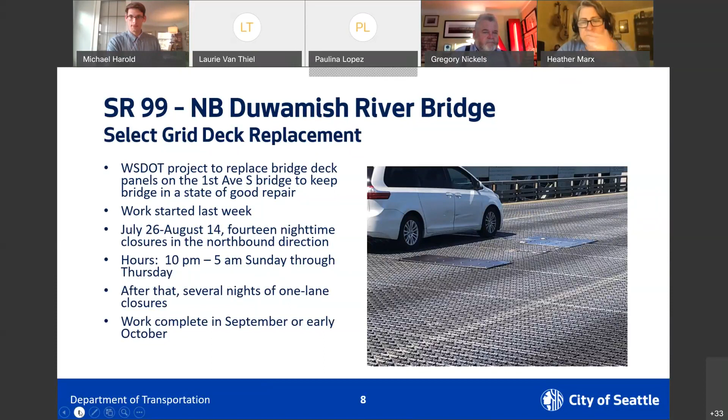transportation benefit district term, and how much the district would charge. Most of that is going to be sales tax, but depending on what kind of response we get from the state Supreme Court, we may have a vehicle license fee there. If you have more questions about that, please put them in the chat, and Bill Laborde, who is our resident expert on this topic, can answer that.

One of the important things is that there is a lot of, next slide, please, sorry. There's a lot of support within this STBD proposal that would address some acute mobility needs that we have in West Seattle and the Duwamish Valley. It would support more surface transit so that we can achieve that 30% transit mode split that we are after, and also remembering that all of that traffic that is funneling through South Park and Georgetown is an equity issue. So we want to make sure that we provide people lots of options so that if you're able to avoid using your car through South Park and Georgetown, you do so. Next slide, please.

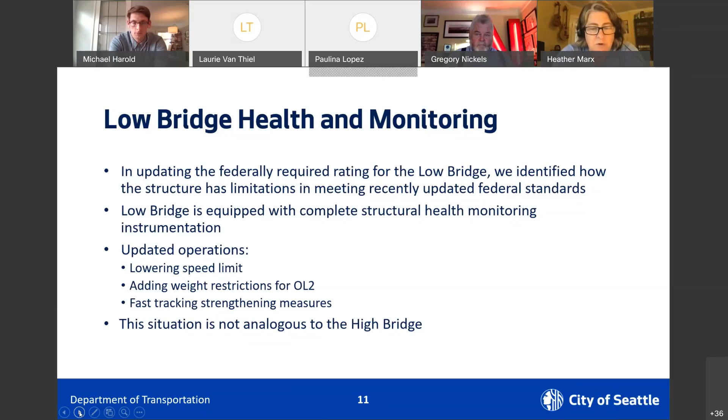So as we learned about how the low bridge is not living up to those new standards, we have taken some administrative steps to protect the bridge. The first is lowering the speed limit to 25 miles an hour. In addition, we're adding weight restrictions for the very largest trucks. They're called Overlegal 2, and we are fast tracking some strengthening measures that are going to help that. This situation is not analogous to the high bridge. There is not a concern right now that we have any kind of failure future for the low bridge. Next slide, please.

Our analysis indicates that an additional 160 vehicles can use the low bridge at any one time. And because this is the way traffic modeling works, we have to assume that those 160 vehicles are going to show up at any given time. So we have to plan for all of them to show up at once. Next slide, please.

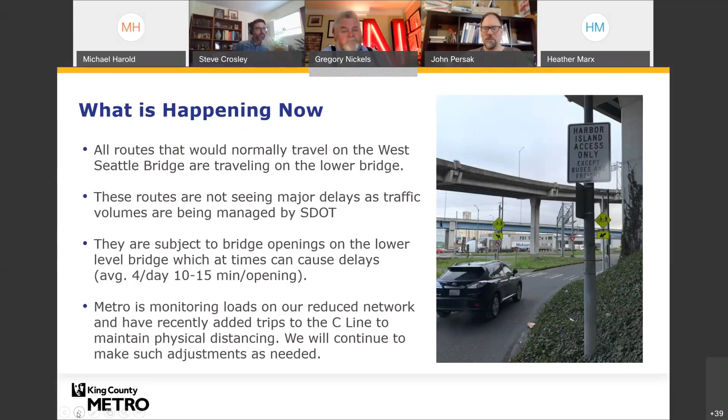As part of our action plan, we immediately set up a team to address the West Seattle response, and then we also set up a data analytics platform. Metro uses Microsoft Power BI to analyze data analytics, and I have a next slide actually showing a highlight of a page, but what we're actually looking at is route ridership by time

period. We're looking at bridge passenger loads, not just overall route ridership, but bridge passenger loads and crowding on that. So essentially thinking about the last stop for the C Line on Avalon and Yancy, and then the first stop for the C Line over Alaska and Columbia. How full is that bus compared to how full it would be in other parts of West Seattle?

Another really important thing that we're doing is we're monitoring segment travel times, and we're actually trying to disaggregate that even more than just from stop to stop. What that allows us to do is really assess reliability and any variance in that travel time. And for any wonky people, we're looking at standard deviations. So basically, if the overall standard deviation of delay is increasing over a period of time, then we know that that segment is becoming more unreliable.

And that allows us to, again, take a look at that segment and see if any transit priority improvements could be implemented. We're also monitoring bridge openings and delays, and we're actually doing that on the First Avenue South Bridge, the South Park Bridge, and the Spokane Street Bridge. Next slide, please.

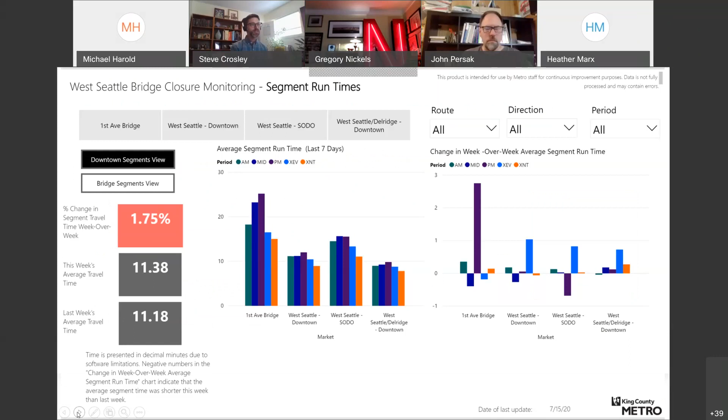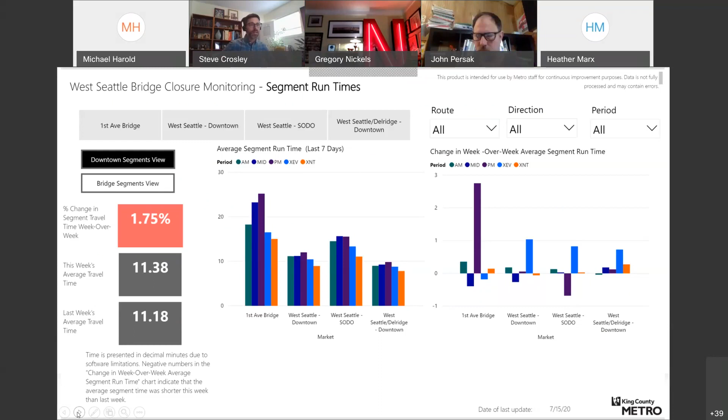And so you can see the PM peak, that purple line over on your right-hand side of the screen. There's a lot bigger variation in travel time on the First Avenue South Bridge in the PM peak than there was previously, and that's probably a lot to do with increasing traffic congestion. We also have these sheets for all the other types of data analytics, and we update them on a daily basis. Next slide, please.

So here we're going to get into Metro's response and our action plan. The day of the closure, we immediately established a West Seattle Bridge response team. I was designated as project manager. I report to Bill Bryant, who's the manager of service development, and then we all report directly up to our general manager, deputy general manager, and chief of staff on this project.

We meet frequently with SDOT to identify opportunities and develop solutions. We probably meet with SDOT in a variety of natures at least 3 to 4 times a week to talk about different aspects of the West Seattle response. We've also conducted some origin and destination surveys and analyses to understand travel patterns. The city has also done the same.

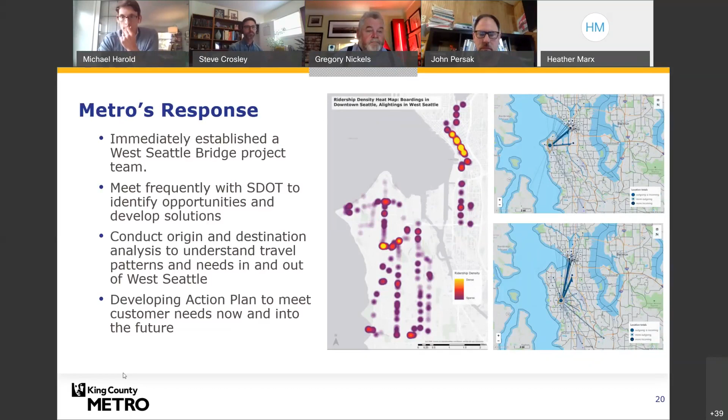Oh, so what I want to highlight about our action plan is that we are anticipating multiple scenarios. Right now, the Low Bridge is available and it's prioritized for transit and other essential traffic. Again, I live right in the neighborhood. I've taken the bus in and out of downtown just a couple times to see how things are going, and we are very reliable. It's a really quick trip because, for anyone on the port call today, we actually have added stops on Harbor Island to provide accessibility to the marina.

You probably can't reach North Harbor Island without some sort of assistance or a shuttle. But those stops on Spokane, on Harbor Island, really provide easy walking access to the marina. And so we're really hoping that the Low Bridge remains open and accessible and reliable. And that is really our best reliable pathway.

But we're also planning for and have already addressed short-term closures of the Low Bridge. We have reroutes in place when those occur. There have been planned closures of the Low Bridge and there have been unplanned closures of the Low Bridge, and they have been short-term closures. And so we have reroutes planned to go down West Marginal Way and over the First Avenue South Bridge. And then we have the third scenario, which we hope does not occur.

And in our discussions and meetings with Heather Marx, it sounds like that is hopefully less and less likely these days, with the city hopefully being able to wrap the structure. But if there is instability or some sort of collapse scenario and a long-term closure of the low bridge, we do have contingency plans for that as well.

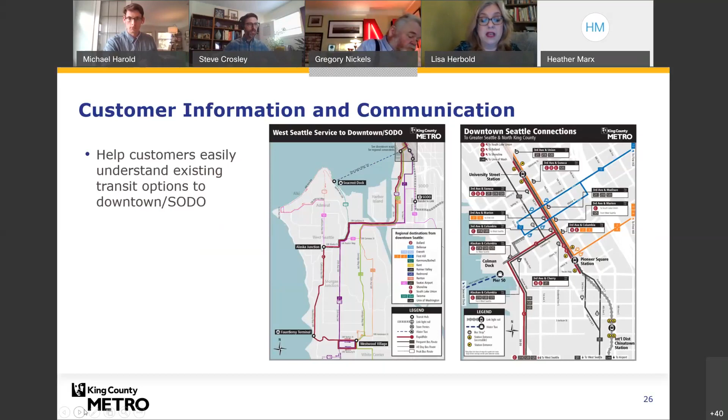And again, we wanted to disaggregate some of that to help the customers understand, because there's a lot of service going on 2nd Avenue, 3rd, 4th, and 5th. And really, this is to help people both coming in and out of any regional connection, how they can easily access any of those stops. And again, we also have Link stations highlighted in there as well. This is a work in progress, but we're really trying to keep things simplified for our customers.

And I think that really sums up our overall action plan and the work that Metro has been doing. We have a really robust team that is made up of the Marine Division, service planning, our system impacts group, our communications group, and overall service development group. And so we've been really happy with the progress we've made and the coordination we have with the city. And any time remaining, I'm happy to answer remaining questions.

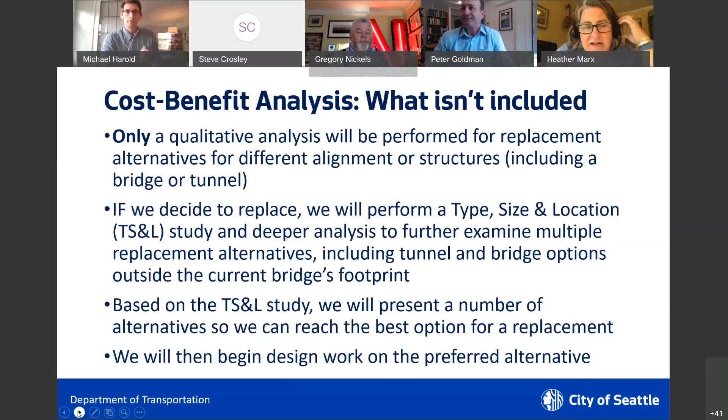Let's move on to the next slide to just ground that. Great. Yep, I think that's a great idea. I just wanted to, before we move on to the additional detail, make sure that everybody was sort of with me. Hi, Councilmember Herbold, what do you got?

I just wanted to get the timeline straight for decision making. The slide back on, I think it was slide 31, says that the CBA will be done in October. But what is our estimated timeline for making a decision about whether to proceed with repair or replacement? Are you planning that decision to be in October also, or is that sometime after? Yes. We anticipate that we will have a recommendation and a decision in October. Okay, thank you. We're trying to move these things along as quickly as we can.

Okay, so there are 3 scenarios: shore, repair, or replace. So in shoring, we have a temporary shoring situation. There's a potential to restore traffic in 2022, and it might last 3 or so years. In the repair scenario, there are 2 options. One is repairs including carbon fiber wrap and external post-tensioning with foundation strengthening. That would last about 15 years and be done in 2022.

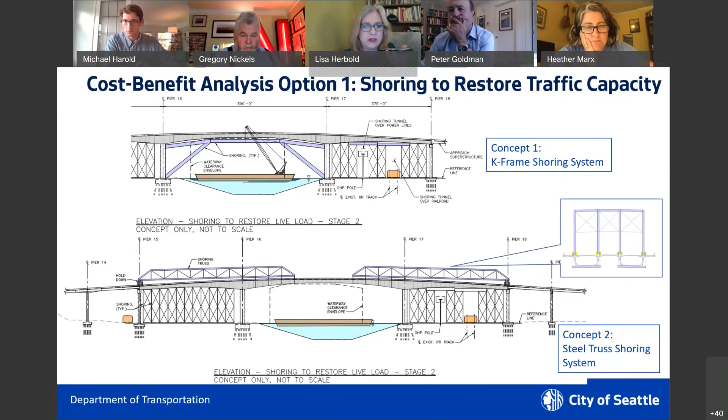Oh, let me just note that our engineers would want me to reinforce to you that these are not to scale and they are just for illustrative purposes only. So please don't fall in love with any of these. Cost benefit analysis option 2. This is repair to restore traffic capacity. One of the things we could do is install additional post-tensioning and stabilization. Next slide, please.

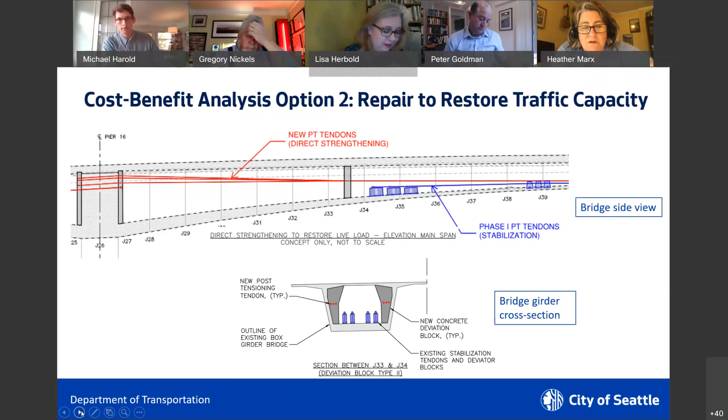So the superstructure, you may remember from earlier conversations, superstructure is everything that's above the piers. So the bridge deck, as well as the structural elements, in this case, concrete box girders that hold it into place. So for that middle span, we would raise a steel box girder into place. Next slide, please.

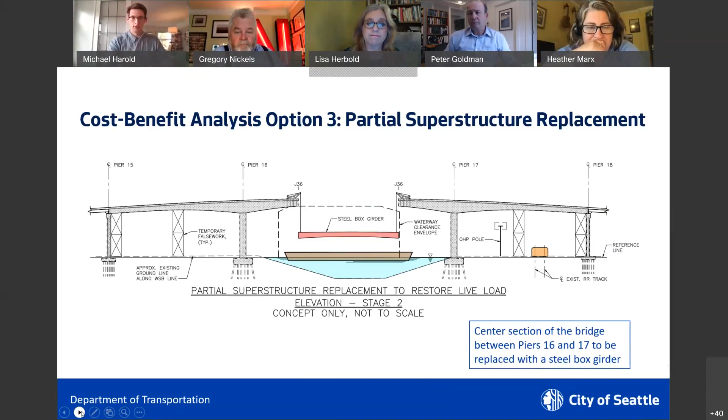Option number 4, we're looking at both a concrete balanced cantilever. This is essentially replacing what we have with a similar response. So another concrete box girder. And then the second concept there is a steel box girder for the bridge. So again, full superstructure replacement. Next slide, please.

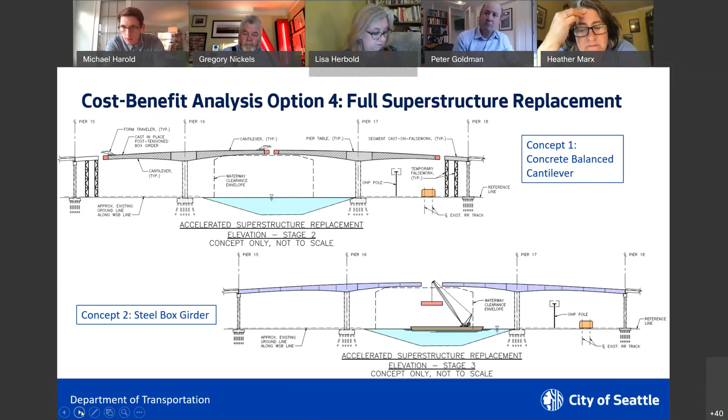Option number 5 is the full replacement in the same footprint. We can all ooh and ah over the cable stay bridge, but these are full replacements in the same footprint, a steel truss bridge and a cable stay bridge. And next slide, please.

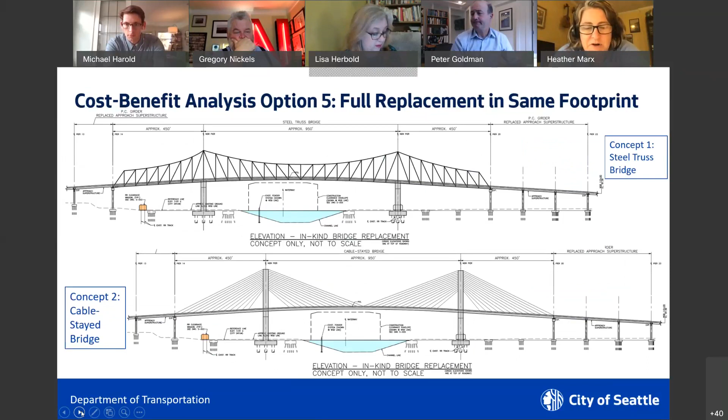So this is an option for the tunnel concept. What we're exploring for the CBA would run under the current bridge. If we decided we wanted to pursue this into the type, size, and location study, we would have more leisure to design a tunnel that would be in a different alignment. Next slide, please.

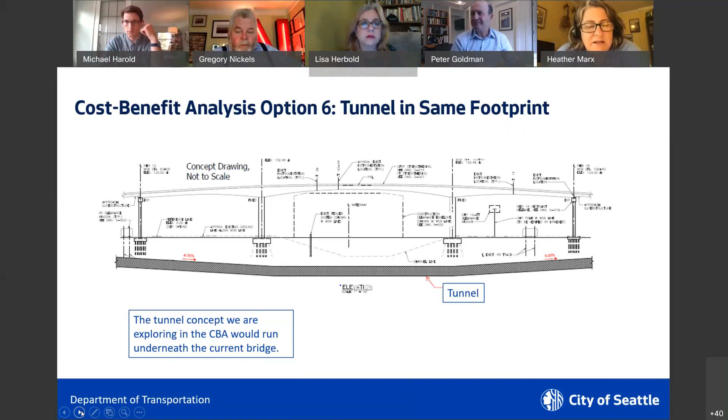So this is the first set of evaluation criteria. We have another. These are the questions that we would ask ourselves for each of these options related to the evaluation criteria. So constructability means exactly what it sounds like. Will the contractor be able to build the bridge given site constraints and schedule? Environmental, what kind of temporary and permanent impacts will the bridge or tunnel have on the Duwamish River and surrounding area? Can we build it within the mandated in-water work windows?

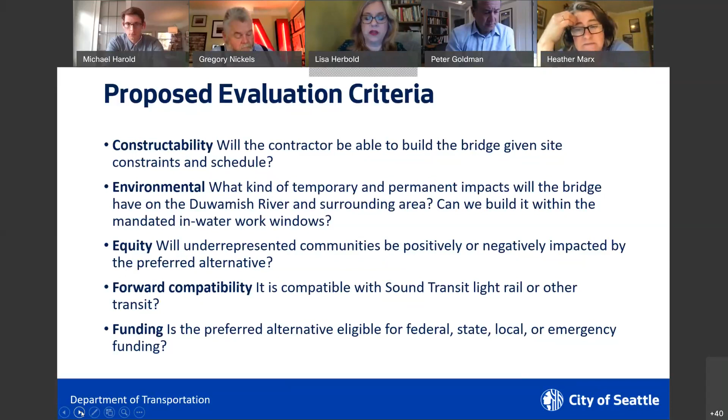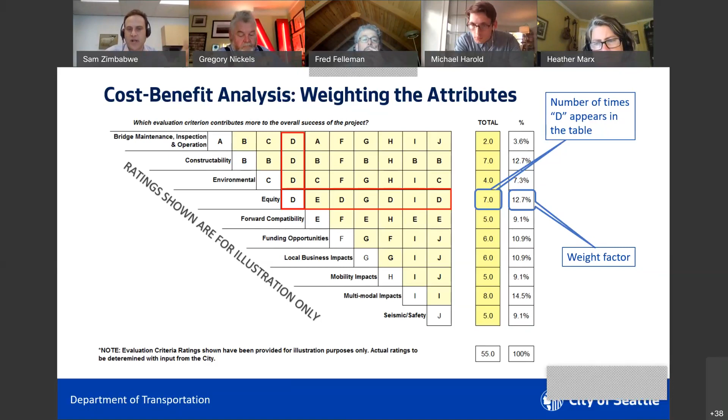Right. Then for each project, each alternative or scenario, we will be able to evaluate the costs and the relative impacts, and then use that weighting criteria to come up with sort of a final number or range of numbers that inform that cost benefit analysis in total. So once the evaluation rating criteria are set, we don't adjust those for the different scenarios. The scenarios have different relative benefits associated with them, or sort of impacts, effects thereof.

I also want to maybe address, and Matt's going to do it, I think, in the chat as well, just a little bit more on the tunnel and the reason about apples to apples. I don't think we know yet enough to know what the construction type of a tunnel would be. And so we're trying to make some educated assumptions at this point about, for any of these, the constructability or how they would be built, what exact construction type we would end up with. And so we need at this scale to get enough information that we have an apples to apples comparison, and at the same time keep moving forward on the type, size, and location work that we've received proposals from consultant firms on, and we'll continue that work as fast as we can as well. We don't have people under contract yet, but that is where we'll get into some of those details.

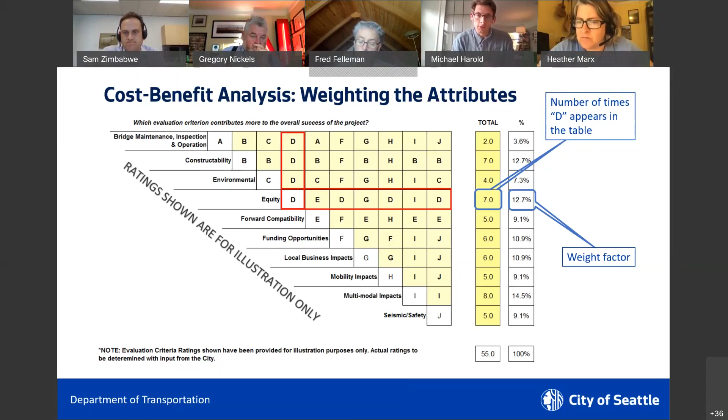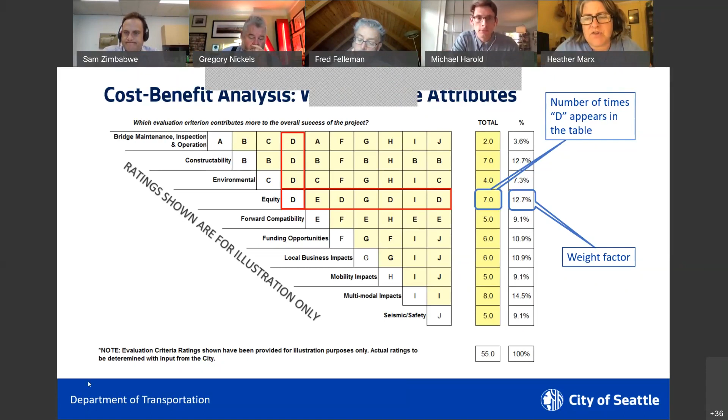Thank you, Sam. We have just a few moments before we're going to transition to breakout groups, but I do want to just try and lump in a couple of additional questions as they relate to the CBA. First of which, Megan, can you just provide everyone with a reminder for the window of time here for additional feedback? We actually have a slide where we can talk about that. So why don't we move on to the next slide, which will be familiar to all of you, our decision tree. And so the cost benefit analysis is the tool that we are going to use to inform our repair versus replace decision. So this is the moment. Next slide, please.

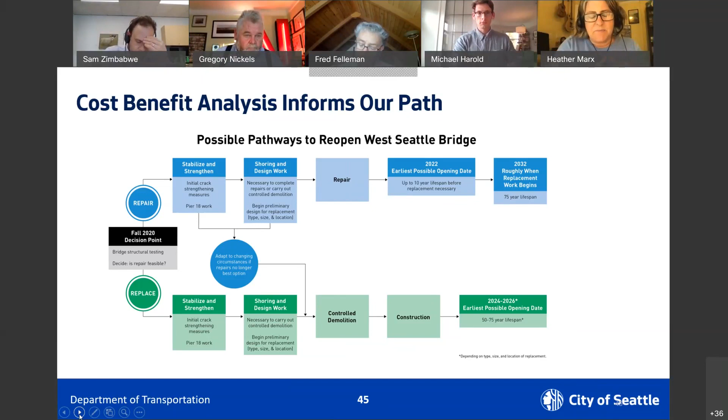So at our next meeting, we are going to hear from the technical advisory panel co-chairs, and we're going to discuss both the repair feasibility and the cost benefit analysis. So you have some time to ponder the list of criteria. We do need to finalize that at a certain point, probably along about August 19th.

And so on August 19th, we're going to sort of finalize our cost benefit analysis criteria, have a little bit more discussion about that, and then review the Reconnect West Seattle draft plan. Then September 9th, we're going to see that second part of the cost benefit analysis. Send yourself way back up in the slides to remind yourself about that. And we will present our final Reconnect West Seattle plan. So that's how we're going to stage it over the course of the next handful of weeks.

And so I encourage everybody to really examine this. And like I said, we'll send out a blank Excel spreadsheet so that you can play together and see how that changes the weighting, because Sam's exactly right. The ultimate goal of that matrix is that final right-hand column that listed the weighting. That's how we're deciding which criteria in the analysis is the most important. So take some time with that.